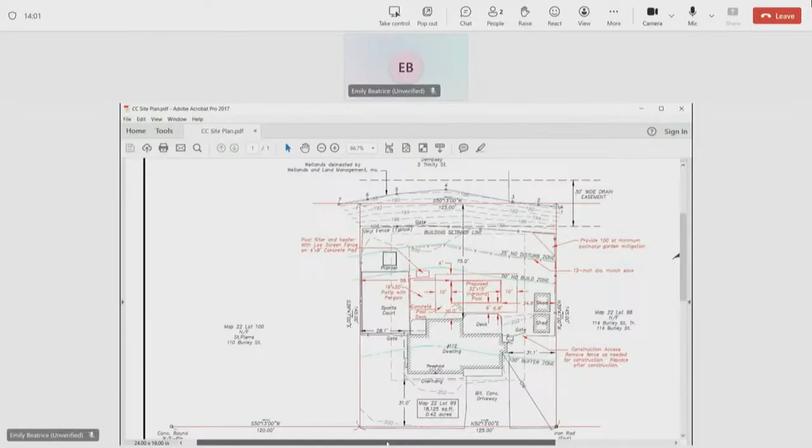So we have bank resource area here, the bank of this tributary brook. This is the proposed pool with a concrete apron around it. This is the 35-foot no-disturb zone line and then the 50-foot no-build line. The improvements they'd like to do are the pool, the apron around it, and this is where they'll put the mechanicals, the filter and heater. Then there's a concrete slab, a patio, with a pergola over it. So all of that, with the exception of this small triangle, is outside of the 50-foot no-build zone.

This triangle is about 45 square feet. They've tried everything they can. They're aware of the 50-foot no-build zone and tried to respect that in every way. They even reduced the width of the pool - you see it's only 15 feet wide. They minimized the decking around it, and this 45 square feet we consider unavoidable for this type of project.

The backyard is entirely flat. You can see there's virtually no contours here in the backyard - it's virtually level. There's an existing fence all around the backyard. Access will be from the street. There's a gate here. They'll probably have to take that section of fence out and access through here, then put the fence and gate back when they're done.

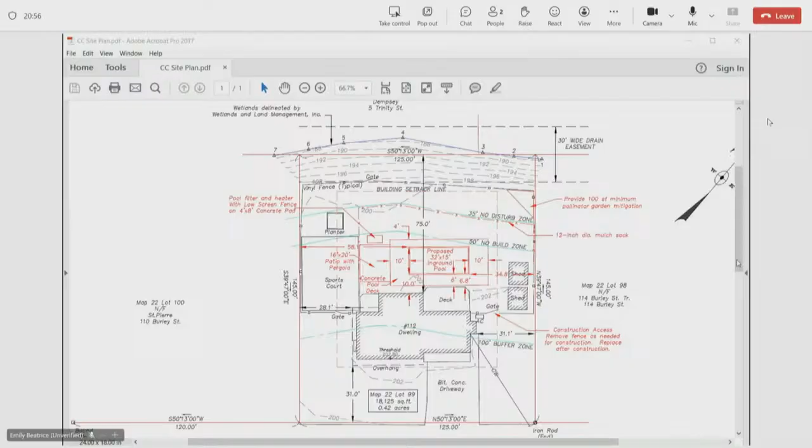Lorraine, any questions? I don't have any questions, no. Mary? Nope, just thank you for the garden. Yeah.

Is there any public comment or questions? Mr. Bradstreet? Bill Bradstreet, Town Meeting Member, Precinct 1. I know you folks have done your job.

Considering what I've been told over the years, the water table's very high in Woodville. If the pool is put in, does that have any adverse effect on, say, the stream or what's behind? I don't know, how deep is the pool, Bill? The deep end is like 6 feet.

I'm not positive of that number, but it's not like a gunite with a form deep end. I'll come up and post it. It displaces water because it has to.

Here's the elevation of the brook. This is assumed datum, but 188 along the edge of the brook, and we're talking nearly 12 feet higher. The brook is kind of the surface water expression of the groundwater elevation. And so we're 12 feet higher than that.

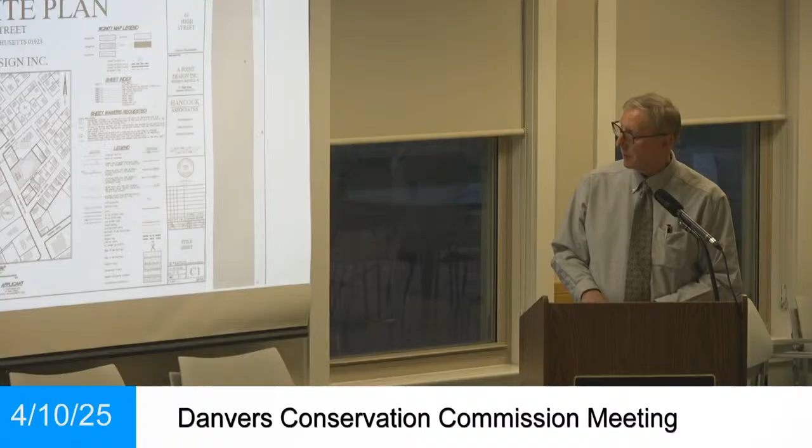So now I'd like to talk to you about the Conservation Commission. It is in the buffer zone to a vegetated wetland in the back of the property, and Emily, perfect, that's the sheet I wanted to see. This is the existing condition survey.

High Street's out here. This is a residential dwelling where Richard lives, Richard and his wife Stacy. There's a circular driveway in front, stone landscaping. The backyard is generally open. There's a hardscape feature here. The limit of wetlands is right along the back of the property. There is a distinct drop-off at the edge of the maintained lawn.

This is a sort of typical vegetated wetland here that has arrowwood, skunk cabbage, jewelweed, the typical suite of vegetation for around Danvers and Essex County. It is a bordering vegetated wetland. There is a culvert pipe that drains this area and sends it off towards the south.

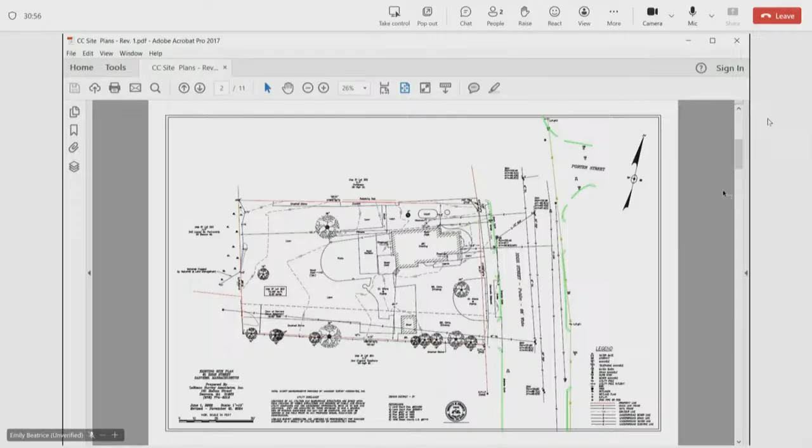This particular plan doesn't have the 35 and the 50, but the rest of the plan sheets do. So I think sheet C5 would be the best sheet to walk you through the project. The project is going to require the demolition of the existing home, driveway, all the features on the lot, and this is a 3-story multi-use building.

We'll have commercial space on the ground floor, and we'll have 8 residential units on floors 2 and 3. The things you want to hear: the entire building is outside of the 50-foot no-build zone.

The only incursions into the no-build and no-disturb zone are related to the stormwater management features here, and your regulations allow for incursion into those zones for the purposes of stormwater management features.

The drainage system is a permeable brick paver system all around on the walkways plus the driving surface. All of the parking is underneath the footprint of the building at the ground level, so that further minimizes any occupation of space at the ground level.

The roof water is collected and directed to this infiltration area. It has to be built up a little bit to provide the proper separation to the groundwater as required by DEP. And so there's a low retaining wall that picks up the grade so that we don't have any unnecessary incursion into the no disturb zone.

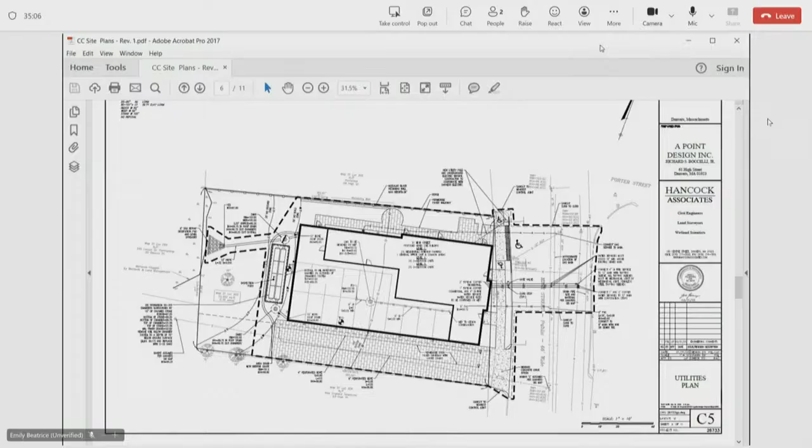Couple quick questions, Bill. The parking is the staircase type drawing? These are the spaces labeled underneath the building, incorporated into the ground level of the building. And that's for the residents, or is that for patrons of the businesses, or both? It's for all the residences. What about clients for the business? Where are they gonna park? They get to use on-street parking.

And my other question is, what is this jog out onto High Street, the dashed line? Limit of work, that's where utility connections are, connect to water, sewer, electric. So there will be disruption to the traffic? Yes.

And where is your erosion control laid out? Is it on this drawing? Yeah, that's what this heavy line is here. The dashed line? Sheet C2, if you could, Emily. Yep.

Sorry, it's moving a little slow here. Yep, that should do it. Sorry, it's very touchy. Yeah, there you go. It actually picks up the demo of that hardscape feature there, so it goes all around, like that.

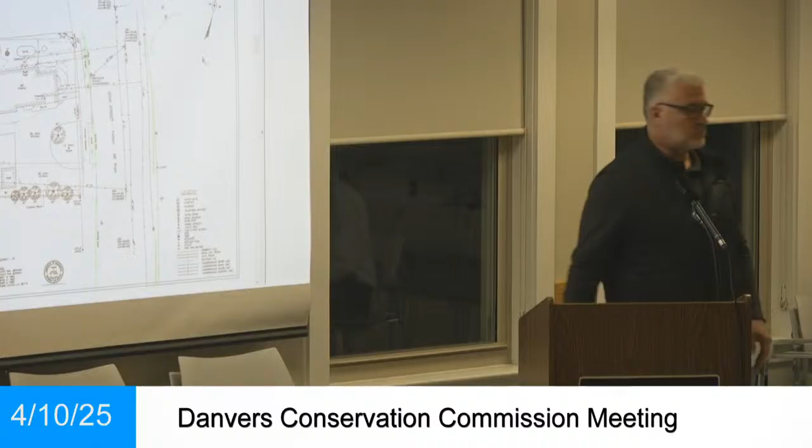All right, that's all I have. Okay, thanks. Lorraine? I wanted to ask about snow removal and snow storage, what's the plan for that? Sheet C5, please.

So, actually, if you would go back a couple of sheets, which one is it? C4.

Perfect. We have an area designated for snow storage right off the end of the permeable brick paver access way. Can you show that again? I missed it. Is that close to the no-build, no-disturb zone? Yes, it's outside of it, but close to it. Is that adequate to store all the snow that would be scraped off of that walkway?

In smaller storms, it's probably going to fill that up. If we have successive storms, then it's going to get stacked up probably a little bit further into the no-build zone, but it's snow, not a structure. In a super excessive storm, they'll have to take it off-site.

And will that walkway be treated with salt, sand, anything of that nature? This is not treated with sand at all because it's meant to be pervious. You would plug it up. Yeah.

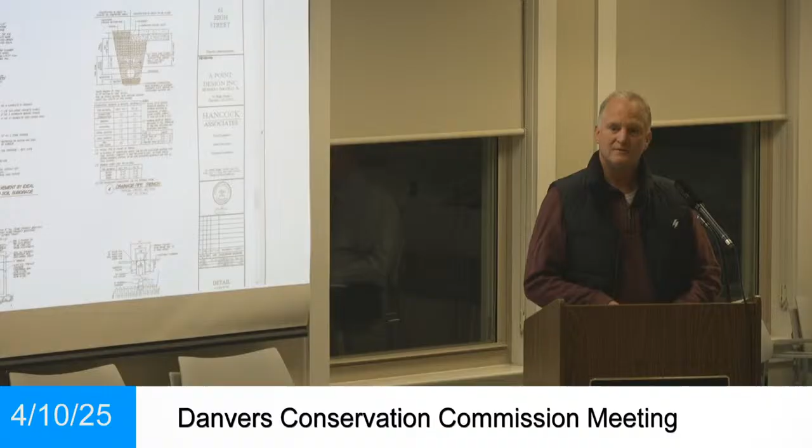With respect to wildlife, there were 2 questions about that: impacts to wildlife habitat and possible paths for wildlife. Wildlife habitat is one of the interests of the act, and there are impact thresholds for when a wildlife habitat evaluation is triggered. Because we're not impacting any bank resource area, any inland flood zone, or any wetlands, we do not trigger any wildlife habitat impact thresholds.

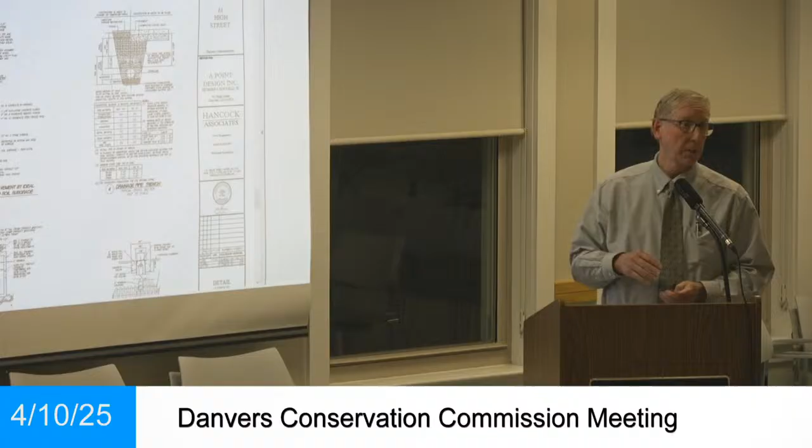So therefore, we're not required to do any wildlife habitat evaluation. Having said that, we're not in the wetlands, so if wildlife is moving through that wetland, they're going to move through it afterward. There are commercial buildings and residential homes that surround this portion of the wetlands. If you would go to sheet C2, please, the existing conditions sheet.

One more, please. There you go. There are homes back here, there's the commercial building here. This is a sewer easement, and there is a berm here and a sewer manhole just inside, just off the property. There is a culvert that was installed to allow water from one side of the berm to the other. None of that is being touched, it all remains as existing conditions. So any wildlife that's there is not going to be disturbed in the slightest, because we're 50 feet away.

All of this is presently open, maintained lawn. It's going to remain open, maintained lawn. The buffer zone essentially doesn't change. The difference in elevation between the wetlands and the edge of the pavement is about 2 feet. It's very gently sloping, and it is going to be grass cover.

I already told you we're not going to sand the driving surface. If any sand gets tracked in on vehicle tires and it does get pushed there, it's going to be minimal, but it will be trapped in that grass. The slope is slow and gradual, 2 feet over 50, so it's just going to get trapped in that maintained lawn area.

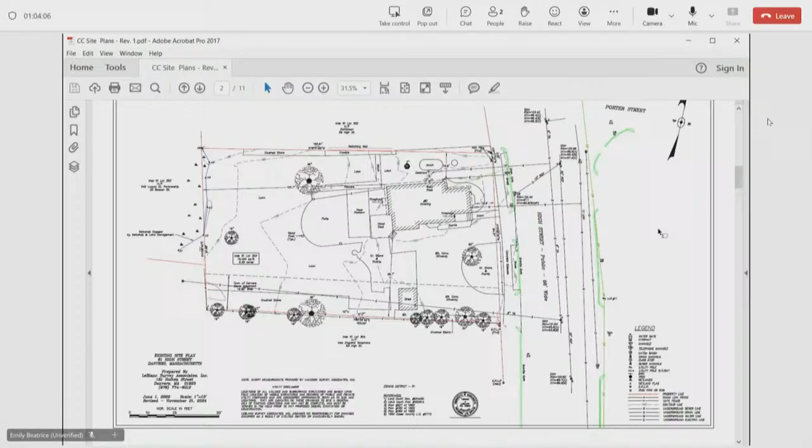I think there was a question about the ability of the system to handle the 10-year storm with there being so much more roof surface now. The engineers have figured that all out. As Jay said, they have either mimicked or reduced the pre-development rate of runoff with their drainage design, and it's been reviewed by engineering, and they've signed off on that.

Everything coming off of the proposed building roof is clean roof runoff. The DEP says you can discharge that directly, you don't need to treat it. Okay, does that answer your questions? Eric?

But it's not, though, right? It's going through the infiltration system. It is going first through the infiltration system, then through the weir, and then it gets metered out. But overall, the design has mimicked the pre-development rate of runoff for the property.

Is that because you don't have to calculate the roof runoff? No, it's all considered and modeled. And that's why you have the infiltration area, that's why you have the weir system, so it meters out the water so that it mimics the pre-construction rates of runoff. There's more water being produced, running off, you're just handling it. Yes, because you're going from a 1,200 square foot building to 5 times that size, 6,000 square feet.

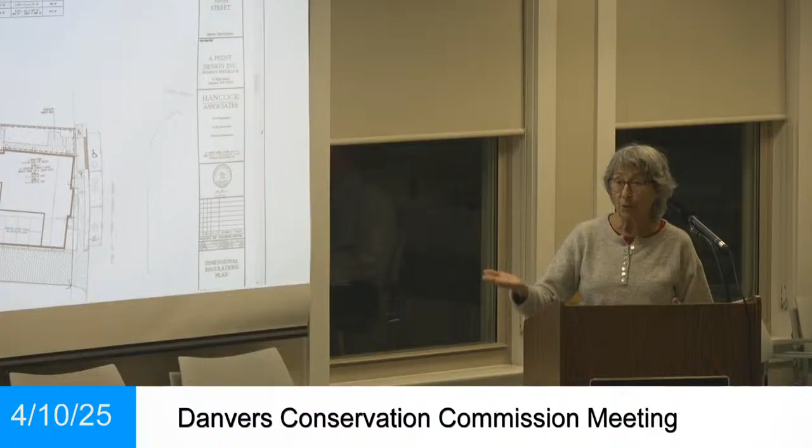The Department of Public Works might have some of those records. I don't think there is. I think what I'm hearing you saying is, do the wetlands expand or contract?

Right, because are we monitoring that? And I would have to say, probably not. Not that I'm aware of. No, usually when there's a project, they have to have a wetland scientist go out and actually put flags in to delineate it. And that's pretty much the extent of the monitoring change from one year to the next.

Sometimes, though, when they come out, if there's been wetlands delineated in the past, and then someone comes out years later, they might find they moved one way or the other, and we take that into consideration. All right, that's why I asked you. Thank you.

I saw another hand up, sir. Malcolm Patterson, I live at 59 High Street, so I'm the next door neighbor. I was at the Tuesday night meeting as well with the planning board.

My question was in regards to the outflow of water that goes into the wetlands, and how through time that may affect water coming back up into my property. Now, I think obviously that was answered last night in regards to what the system is that's put in place there, the 10-year system that's there.

I guess with the climate changes and with things that are changing right now that we see every day and every year in regards to snowfall being more or less, rainfall being more or less, and I think a lot of rainfall, as we've seen over the last couple of years, is a lot more. How big is the system to withhold maybe that 10-year plan?

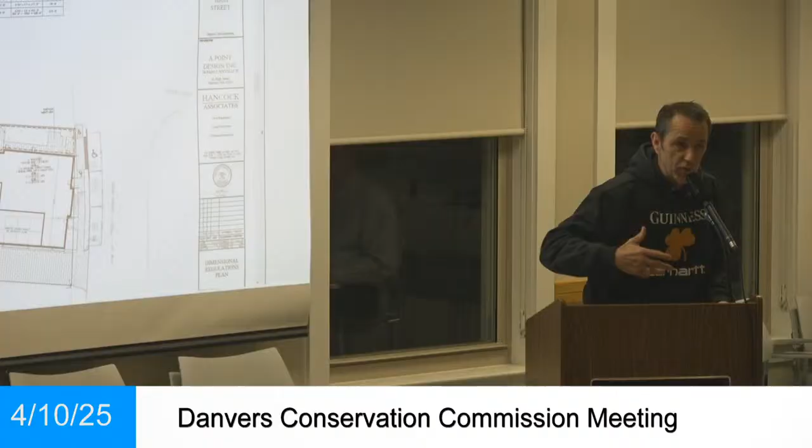Yeah, I got that answer last night, but I guess my question is that if rainfall continues to rise, what's the capacity that this storm drain can hold over the next 10 years? Because things change on a yearly basis. Is the 10-year storm, is that a standard?

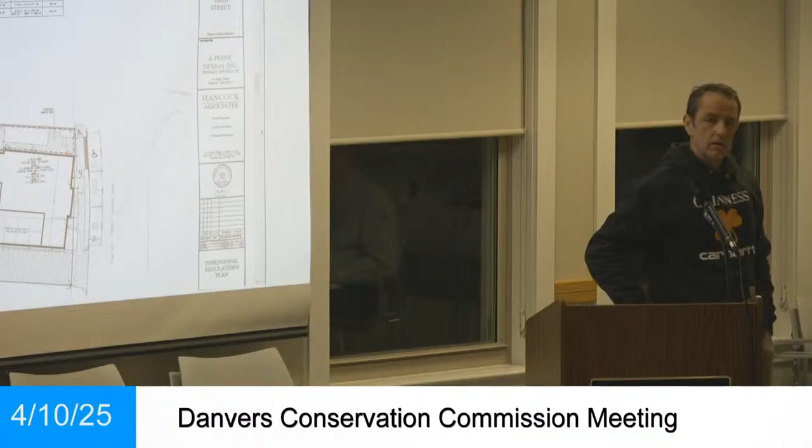Have to meet the 10-year storm limits? So the 10-year storm is just something the town engineering department requests us to hold on site. The system is designed up to the 100-year storm. I was going to say, that's more appropriate than 10-year. So the system will hold, its volume is capable of holding a 10-year storm within its system. But the system is designed to cut down on peak rates of runoff and peak volumes all the way up to the 100-year storm, a storm you'd see once every 100 years.

So 100-year storms don't occur once every 100 years either. Yeah, but this system's designed for that. And when there is a 100-year storm, there's a lot more issues than just this site. From what I'm hearing, if there's a 100-year storm, it's going to be a town-wide problem, not just this one particular lot.

Yeah, and we can only control what happens on this lot. We are not affecting the wetlands, so we're not affecting the flood volume that the wetlands hold. We're 50 or 35 feet away from that, from the nearest work that we're doing. So what we're proposing here is a benefit for flood volumes and peak rates of runoff.

Emily, could you just check with the engineering department and have them verify that this wetland does drain properly? Because I heard something about a culvert. Of course, yep, absolutely. Let's just see if the water has a place to go, and I think that would hopefully alleviate your concerns.

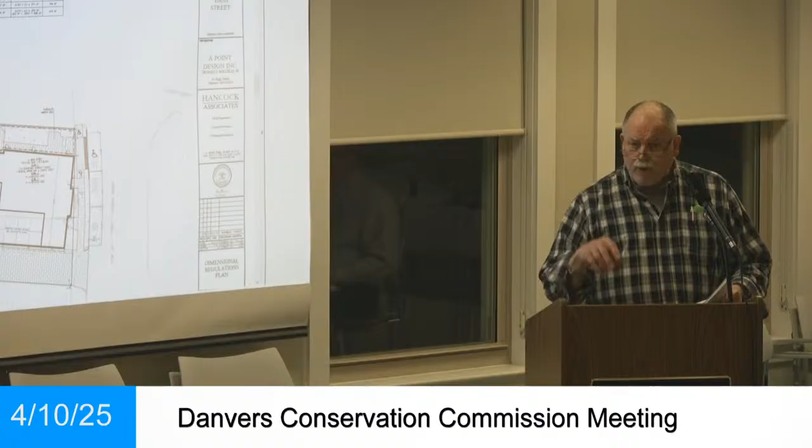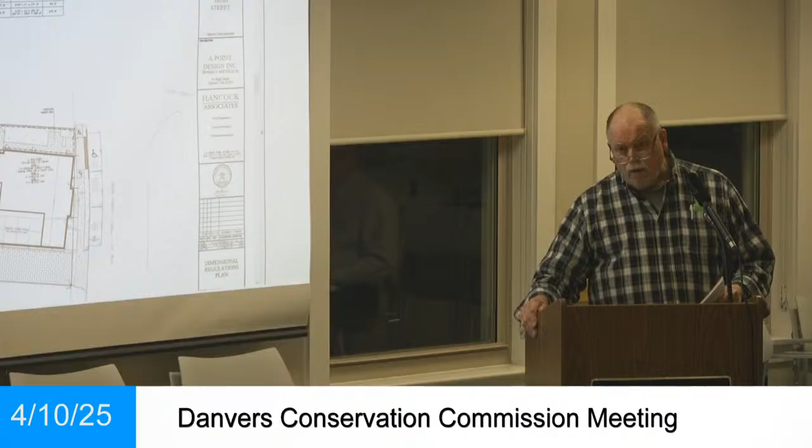We could make that a condition. I guess that's not your issue, but one was if the businesses occupy all of the bottom of these buildings—and again, that's not your business—if they park on the street or on the property with droppings from these vehicles, adding to the contamination of the parking area. I'm concerned with the contamination that could take place on this property where it's so close to the wetlands. I don't live there, I live in town, I drive by there and I see things, and my concern would be for the abutters, the town in general.

Thank you. Or maybe just another condition that no parking is allowed in that walkway area. Mary, do you have a question?

Could we go back to that original? Are there trees there that are coming down, those circles on the front end? Yep, so most of these are Norway maples. If you go to the next sheet, everything that has an X through it is going to be removed. Those are mature trees, Bill? Those are, yes, they're mature trees.

And there are 4 of them in the buffer zone. On the very last sheet is the landscape plan, and that shows 4 trees that are going to be installed in the buffer zone—4 trees in the buffer zone along that northerly property line, plus 4 additional ones outside the buffer zone. Do you know what type of trees they're going to be?

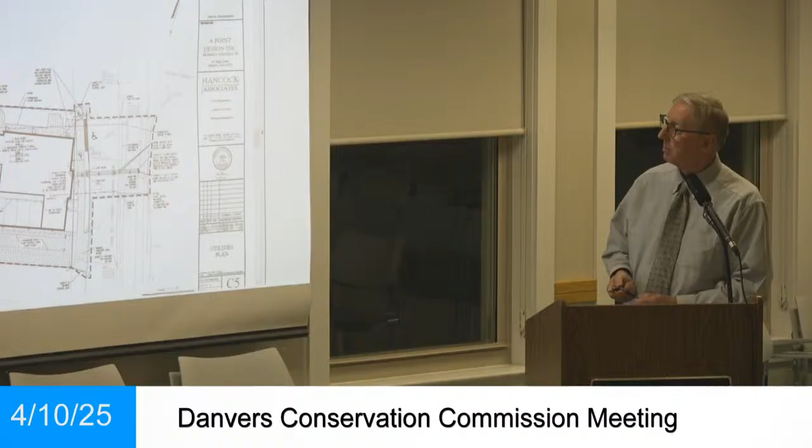If you would go to the last sheet, please. So was that a 1-for-1 replacement? Are you taking out 8, in the buffer zone? It's not 1-for-1. These are maple trees, the ones you're putting back in. And the ones on the left side, are those staying? These down here will stay. They're not going to interfere with getting in and out of the parking spaces. So it's not all the trees that are going to be removed. It's not all the trees, no. All right, thank you.

Any other questions? The likelihood of the demolition of the building going beyond a day is not likely. That demolition process of the dwelling will likely occur within a 1-day period. So everything will be removed as it's knocked down?

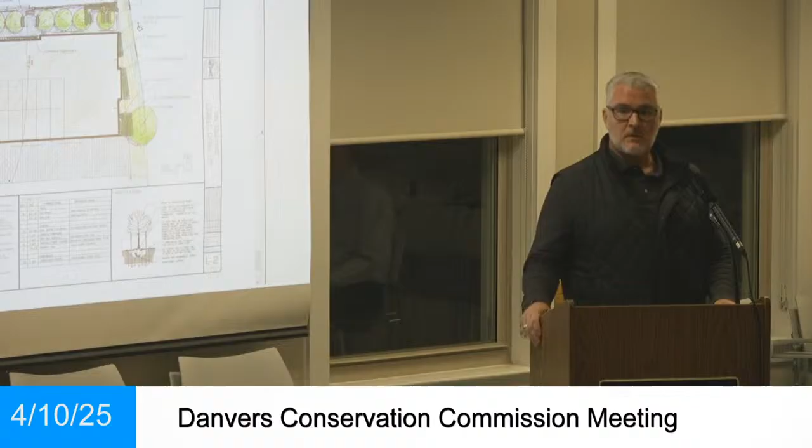Correct. I have a question on your parking, again, curious. The delineated spaces, what are there, 16? 2, 4, 6. There's 16 total spaces. So if someone's parked in the back spaces and someone parked in the front, how will that work? They're tandem spaces, 2 spaces per unit. So each unit has a tandem space. Oh, so they own the space in front and behind? Correct, or the right to it. Yeah, correct, I see.

They could get ugly fast, couldn't it? It could if it wasn't that way.

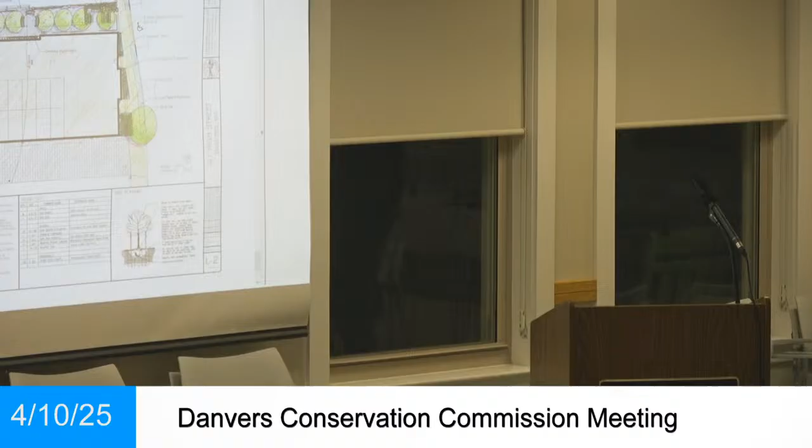Okay, board, what's our pleasure? Well, I'd like to go out and see the property myself. Me as well. I don't know how the rest of the board feels, but I'm good with that. I would make a motion for a site visit if I need to motion that. I don't think we need a motion, or we can just set it up. Let's see if someone else agrees. Okay, so we're kind of on the same page, we all kind of want to get out there and see. Yeah, we all want to go out. Okay, you had a question? Then we get to see the wetland too and get a real feel for it, you know?

There's a whole area back there, not your property, behind there where the trucks go in and out, right? That's near you, isn't it? Yeah.

Hi, Amy Butler, Town Meeting Member, Precinct 1, 14 Hunt Street. I had two questions. The first one is about flooding. I know you're trying to do everything to mitigate that with the 100-year storm with the infiltration system. But if there was any flooding that would happen to affect the abutters' properties, who's financially responsible for that? That's my first question. And my second question is, are there any stone structures on the current property site, any walls or anything like that?

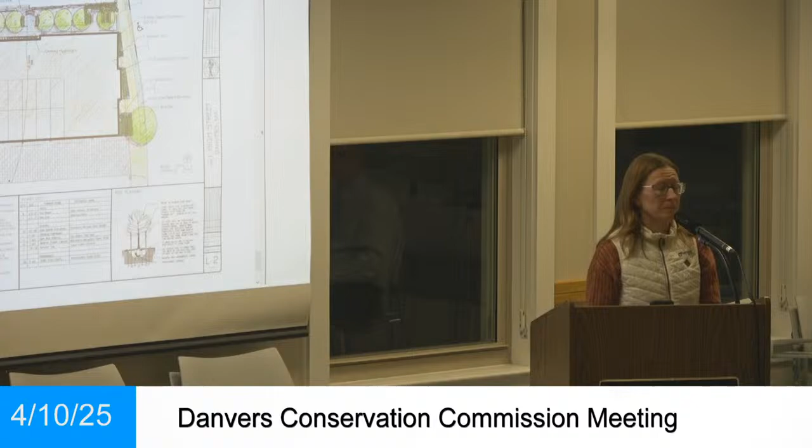There is a stone wall between my property and the Pattersons' property. That is the only wall on the property. It's technically on their property. And my property, at that location, is lower than their property. But as we go back towards the wetlands, mine maintains the same elevation or slight slope, and theirs drops a couple of feet.

The other question of the flooding, the responsibility would be the insurance company. Really? But not yours? It would be their insurance company. How can we even say that? Yeah, I don't even know how to respond to that. The insurance company's going to come in and decide if they're going to give insurance or not.

So are those properties in a flood zone? No, there is no flood zone there, is there? That's right, Bill. Yes, it's not in a mapped flood zone, and as Jay spoke several times, we've modeled the runoff so that we either mimic or reduce the amount of runoff and volume in the 2, 10, 25, and 100-year storms. So if there is any flooding beyond that, it's going to affect everybody, not from this property.

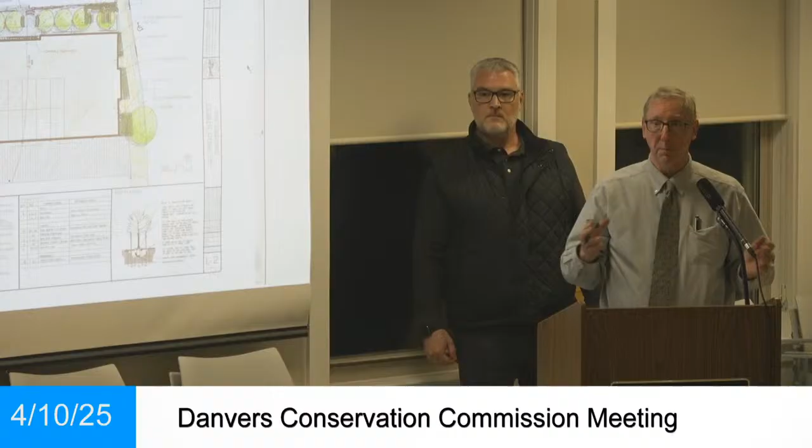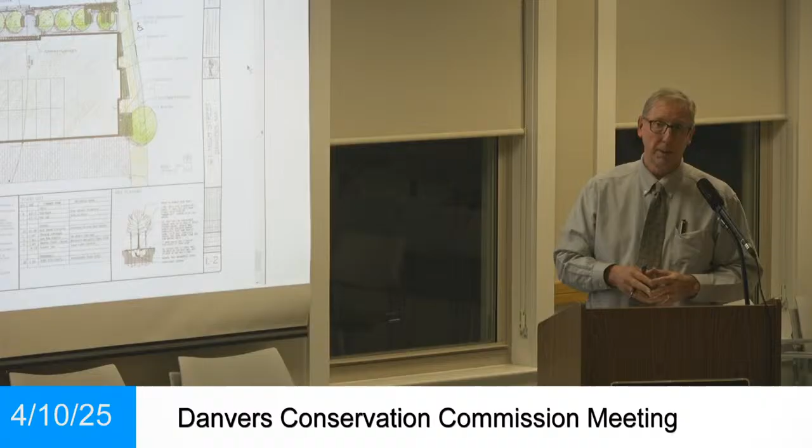What is the reason for the wetlands being there? As I've described in my report, this is a depressional feature between the properties on Beacon Street and High Street, and it drains out through the culvert installed underneath the sewer berm. Historically it was a low area, and folks have built all around it, and that's what's left.

How far back is the rail trail from here? I'm not familiar, so, Rick? The rail trail? Not that far. I just have to think, how many years ago was it constructed? No adjacency to the rail trail.

How far back is it? Well, there are just houses. I'm just theorizing that the wetlands are there partially because of this rail structure that was built 150 years ago, and it altered the drainage. That's all I'm getting at.

From my point of view, it's a significant distance. You have Beacon Street, another street, and then it comes on an angle. It's behind the paving company.

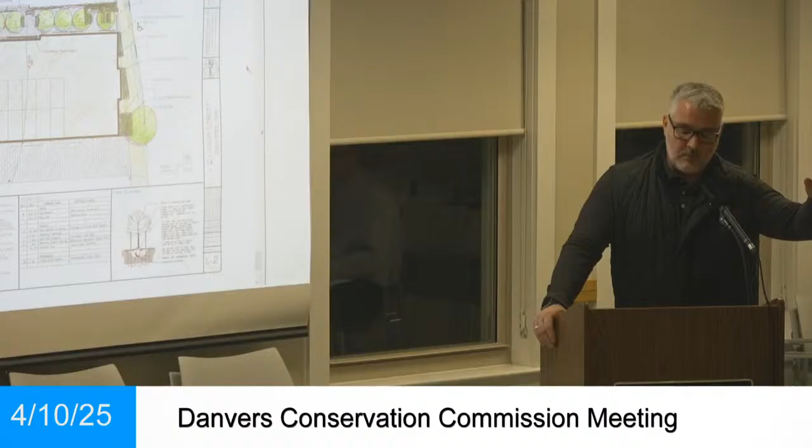Or maybe not. Do you mind going to sheet C1? Making Emily scroll through these drawings, huh? That's okay.

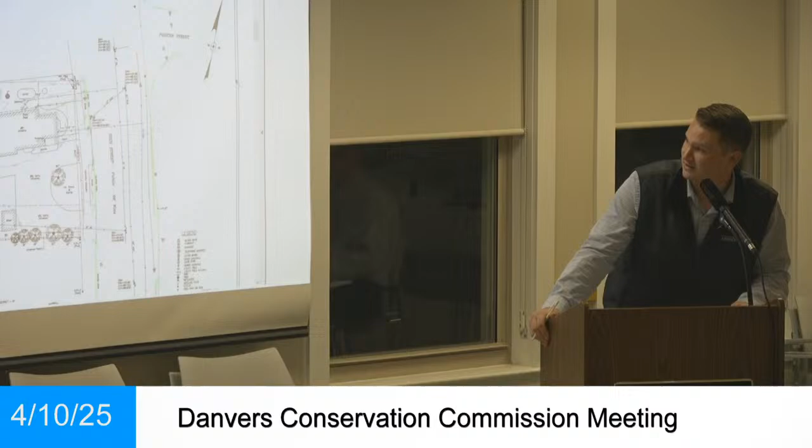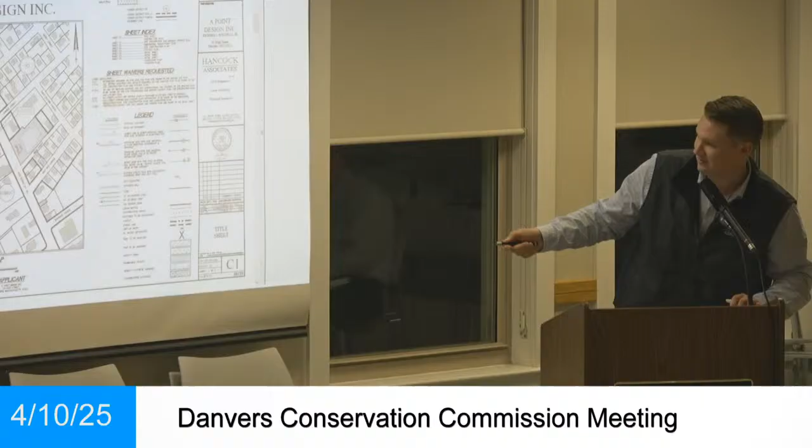So this is our vicinity map. One more, sorry. So this is the subject site right here, and this is the rail trail. The wetlands are somewhere in this area. This is 400 feet here, probably about 1,000 feet away. Okay, all right, thanks.

Okay, so I think we're all in agreement that we'd like to get out and see the site. So can Emily and the applicants make some sort of mutually agreeable plan, and we will continue? Are we going to try after work hours, on a weekend?

For me, it doesn't matter. Usually Emily will send out an email saying when we're available, and we get to some plan. If possible during the week, it's light till 7:30 now. I'll send an email and we'll get together on that. We just find time for site visits whenever we can. It's very informative, absolutely, we expected that.

Okay, that being said, we need to continue this hearing. So if someone can make a motion to do that?

I'll make a motion that we continue the hearing for 61 High Street, DEP file number 14-1432, to our next scheduled hearing date. Is it good with the applicant, and can we get it done in 2 weeks? Yeah, we can try to get this in 2 weeks. I think so. All right, so the 24th then. Is there a second? I'll second it. All in favor? Aye. Aye. All right, thank you, we'll see you then.